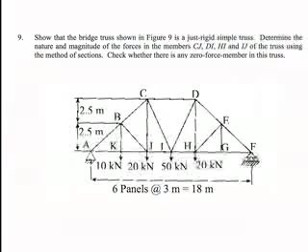Okay, we will take problem number 9. This is a bridge truss.

Basically, this is the bridge deck and this is an assembly to make it rigid. It supports at different points here. Let us say due to the vehicle movement here, there are some forces created.

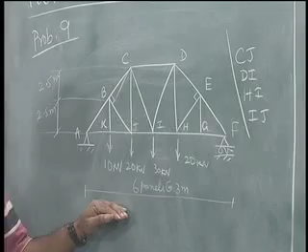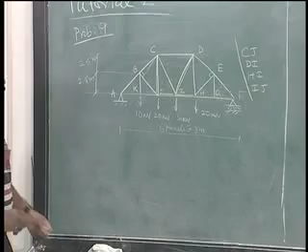Let me just identify them with different colors so that it is easy: Cj, Di, Hi, which is this, and Ij, which is this. We need to find out the forces only on these. This is J.

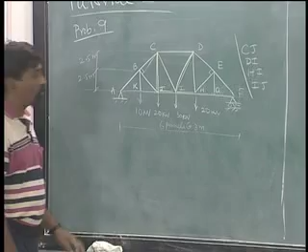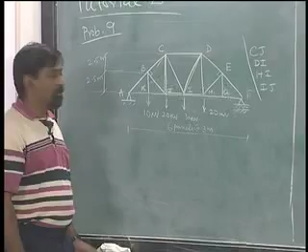Naturally, the method of sections is the best way to go about this. What is necessary to do? We need to be able to cut in order to expose and look at the unknowns, right.

So if I take, for example, Cj and Ij and look for cutting appropriately, the cut could be something like this, and remove this part. Of course, I have to remove the reactions also, which means it is necessary for me to first find out the reactions.

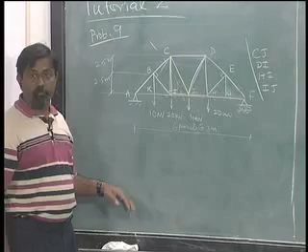That is not very difficult given all these forces. There are two reactions over here, there is one reaction over here, there is no horizontal force, which means the horizontal force reaction at A is automatically equal to 0. The vertical reactions only have to be found out. If I take moment about A, I will be able to find out for this. If I take moment about this, I will be able to find out at A.

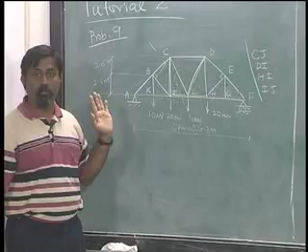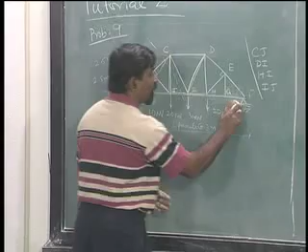So I am just going to substitute this to be, let's say Ay, and it is a known value now. I have already computed using the equilibrium of this structure.

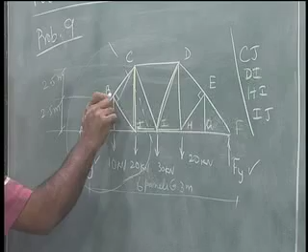So if I take this free body, it is now clear that member BC, CJ and IJ are cut. How many equations can I generate using this? 3 equations, 3 equations, 3 unknowns, it is possible for me to solve.

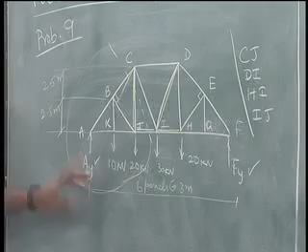Let us just do that before proceeding further. So I am just going to redraw this whole thing for this section. This is the cut. This is the cut. This is B, this is C.

This is J, this is I. That is all I need to draw. So I am exposing BC over here, CJ and IJ.

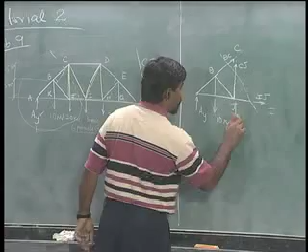There is a force Ay acting on this, there is this 10 kilonewton acting at this point, 20 kilonewton here. All the other forces are external to this body.

Now, what is needed are the member force at IJ and member force CJ. How will I go about doing this?

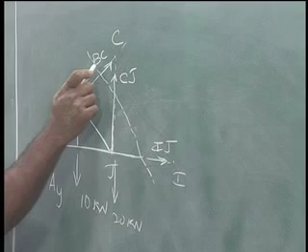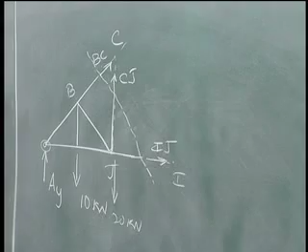Very simple. I do not need to find out this, which means I should try and write down the equation of equilibrium that involves moment equilibrium along this line BC. If I take intersection of BC and IJ, which is this point, and take moment about that, the only one that is unknown here is CJ. So if I take sigma m A

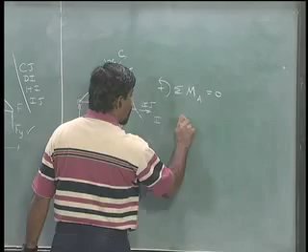equal to 0, that will involve this 10 kilonewton, 20 kilonewton external forces. BC will not be involved, IJ will not be involved because they are along that line concurrent to this point A. So only CJ will be involved, which means it is possible for me to find out CJ from that equation.

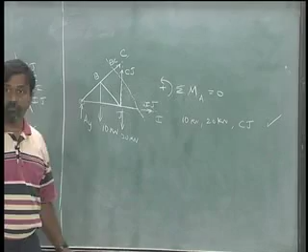Having found that out, how do I find out IJ? Well, I have to take an intersection of BC and CJ, which is nothing but this point C, and if I take moment about this point, I should be able to find out IJ directly, which means sigma m C equal to 0.

Mind you, this point is outside this rigid body, but it does not matter. I can take any point and take moment about that point and seek equilibrium, correct.

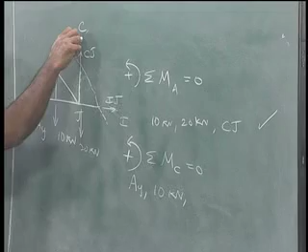In this particular case again I have these two external forces participating, but remember this 20 kilonewton is also concurrent, which means this will not take part, Ay will take part. So Ay, 10 kilonewton, these two will take part, BC and CJ will not take part, IJ will take part. We have already found this out, which means it is possible to find out using this.

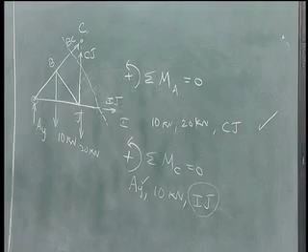Similar is the case when I have to find out for Hi and Di. All I have to do is I have to section it this way now. This is also a nice question. If I have to find out Hi and Di, I can section it like this.

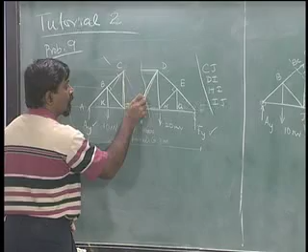So I am just going to erase it directly over here to draw the forces. So I am exposing this force which is Hi, I am exposing this force which is Di, I am exposing this force which is Cd. Let me just circle those forces that are involved.

There is this 20 kilonewton force, there is this Fy which are external. Remember we had already calculated Fy. Apart from that, there are 3 unknowns over here, which are the forces involved in this particular free body, correct.

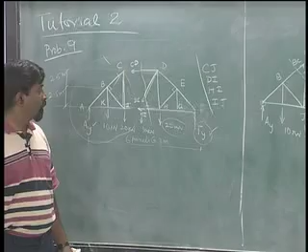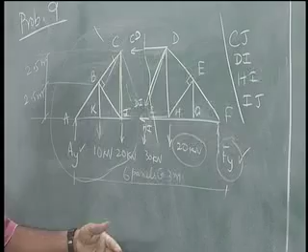Now, I need to find out Di and Hi. How will I go about it? Remember this Hi and Cd are in the horizontal direction. So if I take vertical equilibrium, which is sigma Fy equals 0,

it will not involve Cd, it will not involve Hi, it will involve only this 20 kilonewton, Fy, and the Di component in the vertical direction, and therefore it is possible for me to find out Di from this.

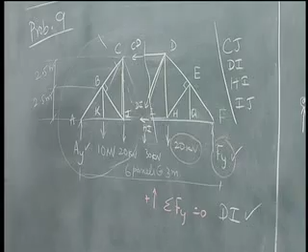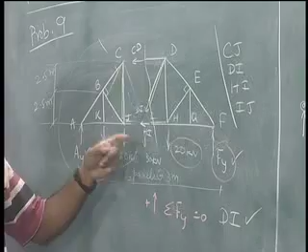Okay. Naturally, the other one is not a very difficult thing. If I take moment about D, which is the point concurrent to Cd and Di, and take moment equilibrium, it is possible for me to find out.

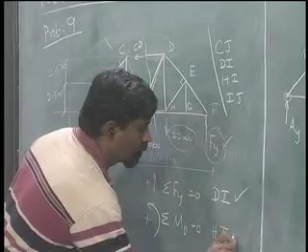It is possible for me to find out HI, because that is the only unknown. 20 kilonewton will not take part, Fy will take part, HI will take part, boom, it is possible to find out immediately.